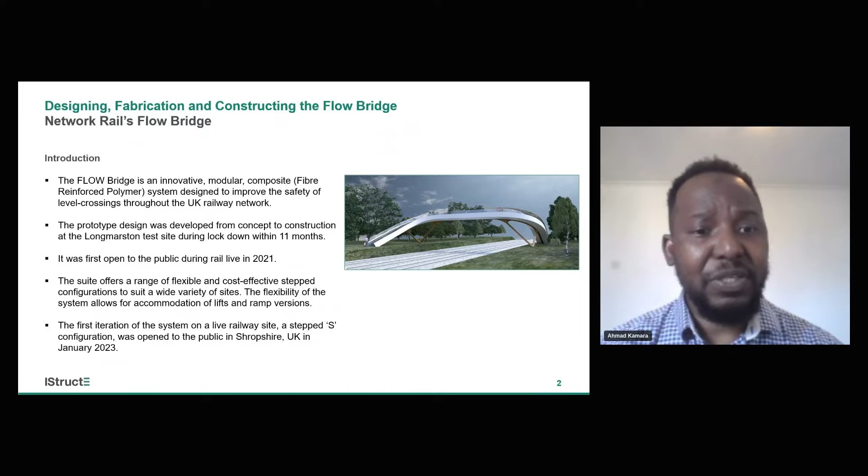The flow bridge is an innovative modular composite footbridge developed by Network Rail, and the initial purpose of it was to find a low-cost, effective solution for closing unsafe footpath level crossings. So to give a synopsis, it took us 11 months from developing the concept to fabricating it on the test site. The design was done during COVID as well, and it was first open to the public during Rail Live in 2021.

The design takes a different approach to modular by looking at various concepts and adaptability that could incorporate a stepped version, a lift version, and a ramp version. But for the purpose of this presentation, we'll stick with the prototype, which is the S-shaped version of the flow bridge.

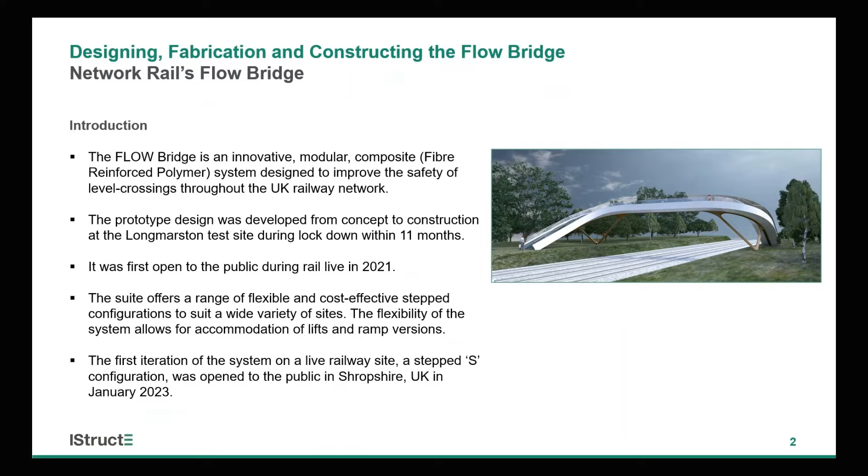Right from the start, the site selected for the footbridge was a non-station environment, which had a dangerous footpath that had been temporarily closed. So we wanted to use this as a test site to demonstrate what this can do.

The objective we had was to develop a low-cost, light-weight footbridge that was resilient, more durable, very easy to maintain, and easy to construct. We also wanted it to be an enabler to help us achieve Network Rail net zero targets, which is to have costs reduced by 30%, carbon reduced by 50%, and the concept developed from inception to entering service within a year.

As a result, some of the criteria for the design meant we had to limit the maximum weight of any modular unit to 2.5 tons to allow RRVs to install it over the railway. Finally, we wanted it to be something that looked good, so it would be accepted in local communities and by the planning authorities.

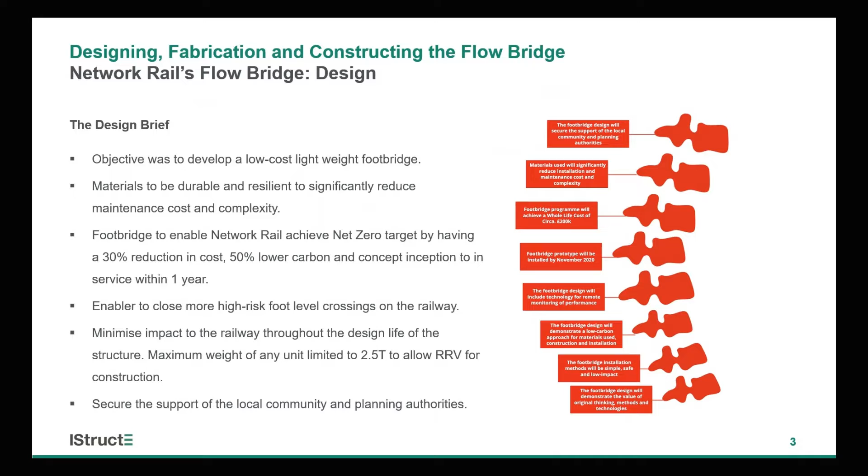The main challenge we had was right at the start of the project, COVID struck, so there was no way of meeting each other physically. We had to find new ways of working together.

Another challenge we had was with FRP design - there was no structural design code for FRP design. We had guidance documents, and at the time of the design, the main guidance document was the CIRIA C779, and we had Eurocomp and other design codes. So what we had to do is look at those with the existing guidance we got for steelwork design and Network Rail standards and other guidance documents to try and figure out how we can get this design done.

There was also lack of manufacturer's data, EPD data, which posed a lot of challenges. We also wanted this footbridge to be a game changer to showcase what's done in composite, rather than copying traditional steel design. We wanted to utilize the material for what it is, which has a high strength to weight ratio. So we thought the design ethos should follow that.

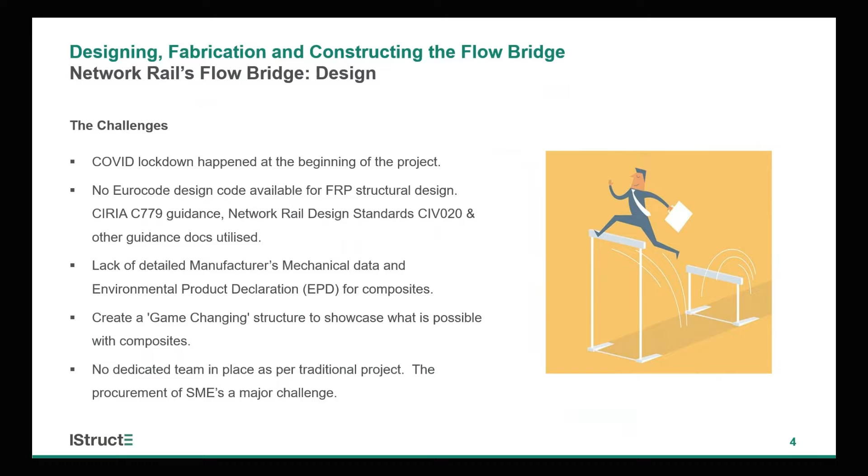So we had no dedicated team in place, so we had to build the team together. But the other challenge we had was securing funding. We managed to get funding from the R&D Research and Development Fund, which enabled us to do the design.

To do that, we wanted to innovate right from the start and do something different. Lessons learned from past projects showed that 60 to 80% of project costs occur during construction, and a lot of time the project cost exceeded the target cost, reducing stakeholders' confidence in our ability to develop projects on time and within budget.

So one of the things we did is Network Rail took on the design and construction lead by taking on these risks. Then by having the research and development funding, that simplified procurement a lot, which meant it allowed us to find the relevant small to medium-sized UK enterprises with the skills that we needed.

From the start, we had Network Rail in the middle, and then we had Knight Architects, who is a renowned architectural firm - we engaged them to help us with the architectural aspects. And then we got SuiGeneris, who do design for baffle tanks and boats.

So we got them on board to help us with the fabrication of the superstructure deck. And then we got Jacobs, a well-known engineering firm with a lot of expertise in FRP, to be the category 3 checkers.

Q-Railing provided the glazing system for the design. KS Composite actually make Formula One cars, but their knowledge in composite materials meant engaging them would be really useful, so they were involved in fabricating the spine, the pier legs, and the carbon Kevlar hinges.

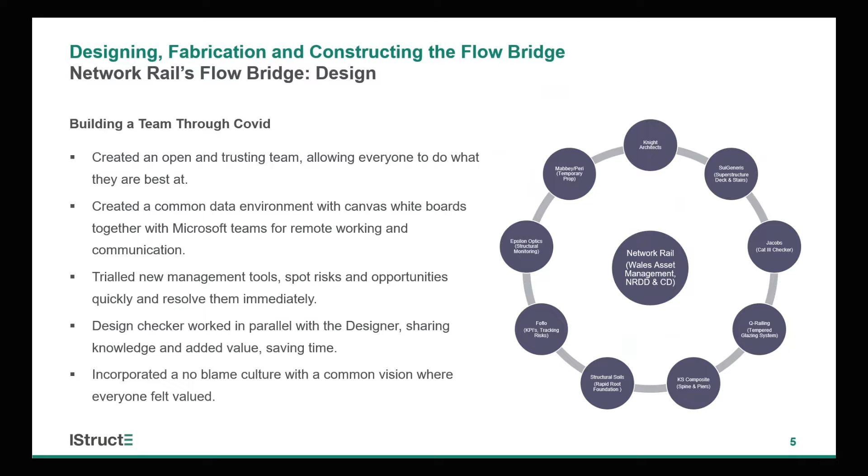We also adopted a no-blame culture. Everyone had a common vision to make sure we deliver the goals and everyone's valued. When we encountered a problem, we just came together and resolved it to find a solution.

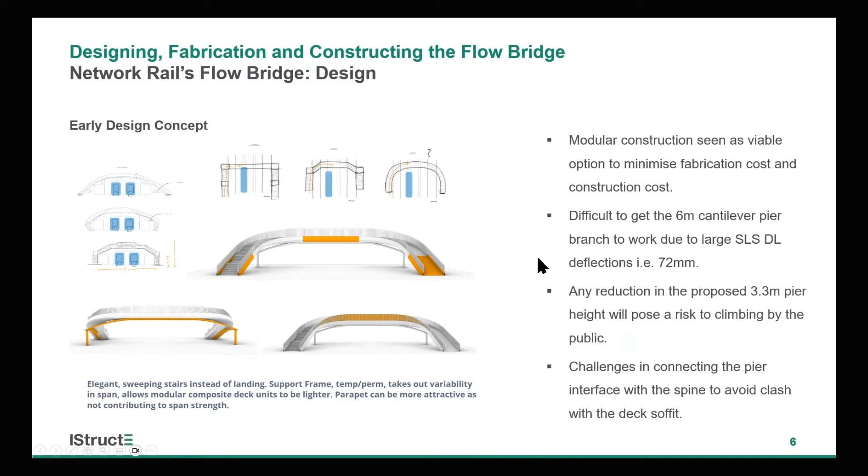That same effect was reversed on the bottom stairs. One advantage of this form of construction is that a normal footbridge of this size would have 6 footprints for the foundation, but we minimized that to just 4 footprints. So that was one saving.

The second thing we looked at was the deck itself. We wanted the spine to provide temporary support for the bridge as well as permanent support. So to minimize the amount of temporary works, we had a gravity clamp system for the deck, where the deck would close and lock over the spine, and then the deck slab locks it in place, effectively making the structure composite. I'll talk about that in the next slide.

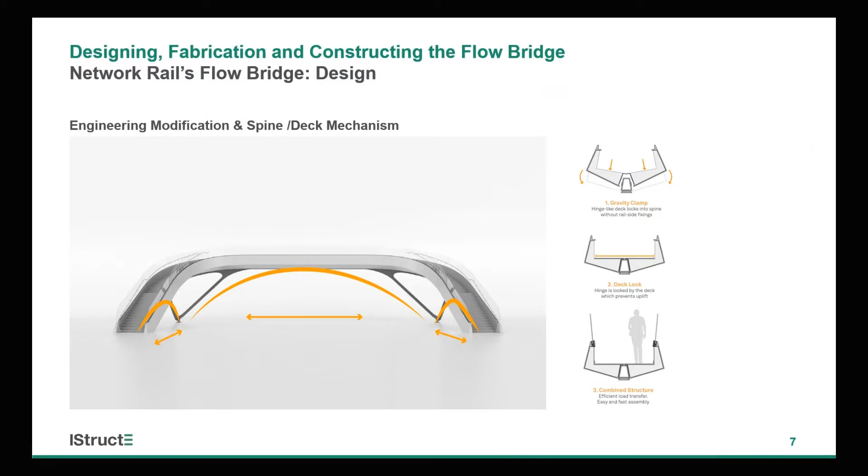So this diagram illustrates how the bridge itself works - the philosophy. We have the yellow bit being the spine itself with the deck over, and we have a carbon Kevlar hinge that runs along that side, which allows the deck to open and close. I'll talk about that in a later slide.

Everything in this unit was fabricated, so nothing was pultruded - it was all made by specific design. The deck acts in tension, and then we have the unit basically coming down, locked in position. With the FRP angles attached to the side of the deck unit, the deck unit is then bolted in position.

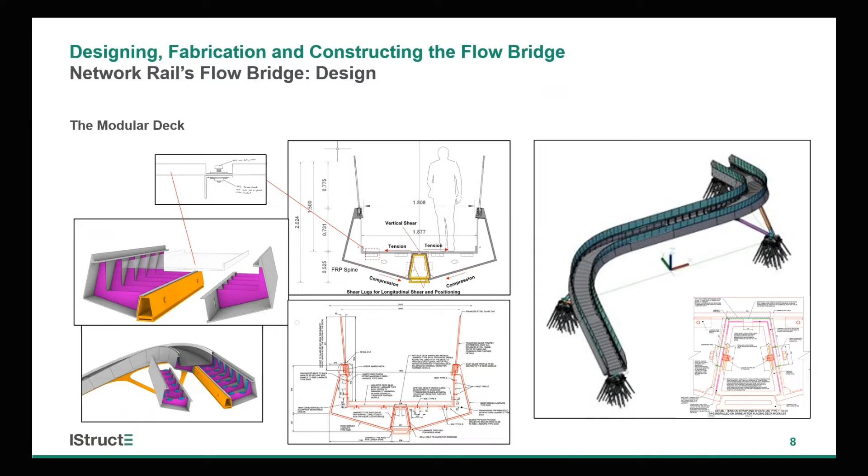The spine is designed to support the weight of the modules during construction and act compositely once everything's put in place.

It was designed to be adhesively bonded as well as bolted, and both designs had to satisfy the design code. For the site-based connections, we utilized bolts, but with a debonding layer - the adhesive in between acted like a gap filler to allow loads to be transferred while keeping the unit nice and tight together when bolted.

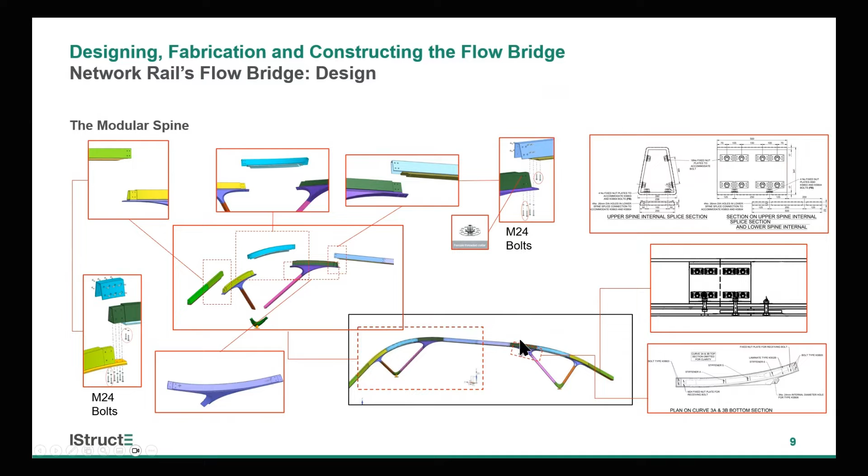We utilized a 3D parametric model for the structure, created by Knight Architects. That created a virtual environment to enable us to test any concept in the design and validate it. Because we were working remotely, it was useful to check and identify any clashes or problems early before being on site.

For the temporary props, they were tested and designed within this environment and then applied on site, and that worked well. A lot of the fabrication and design drawings were produced from this model because it had every single element, which made things seamless in terms of utilizing and detailing.

For the spine legs and the pier legs, we produced some of the drawings and some were produced by KS Composite.

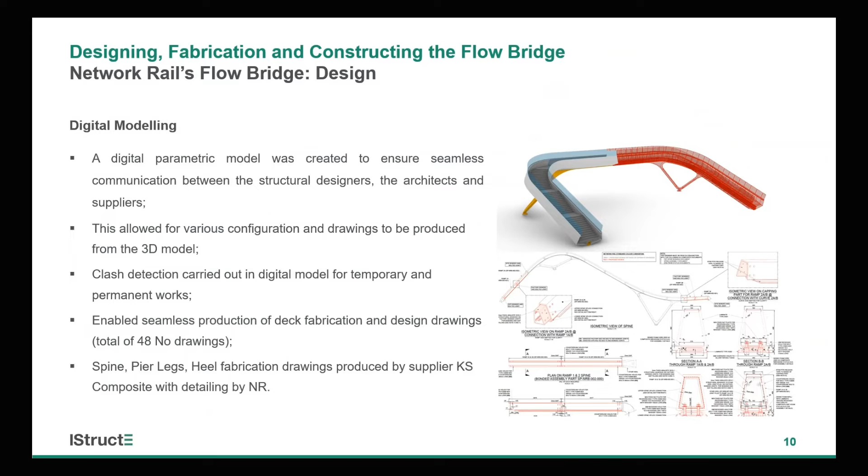The philosophy of this design was to enable the spine to act as a temporary structure to facilitate the construction works, and then in a permanent condition, work compositely together with the deck afterwards.

The spine also enables us to correctly align the bridge in position as we go along, and it enabled the bridge to be stable at all stages of construction - meaning if we're running out of possession, we can secure the site and leave it over the railway safely. That was a big game changer because a lot of the issues we normally have is disruption to services, so we wanted to minimize that.

For the design itself, because it was a new material, we had to limit the strain of the material to 1%. And because the material was not validated by testing but we were using manufacturer's literature, we had to use higher material partial factors of safety as per the requirement of the CIRIA guide.

The hope at the time of design was that by carrying out testing afterwards, when we do the second version of the bridge or a standard version - which is currently being done now - we can reduce these factors of safety to make it even more efficient.

For the bridge design itself, when the units come in, we took into account the safety of workers. We had the unit installed with the side parapet and edge protection, and we also had brace points for people working in it, so they could click on their harnesses at those locations while walking in there safely.

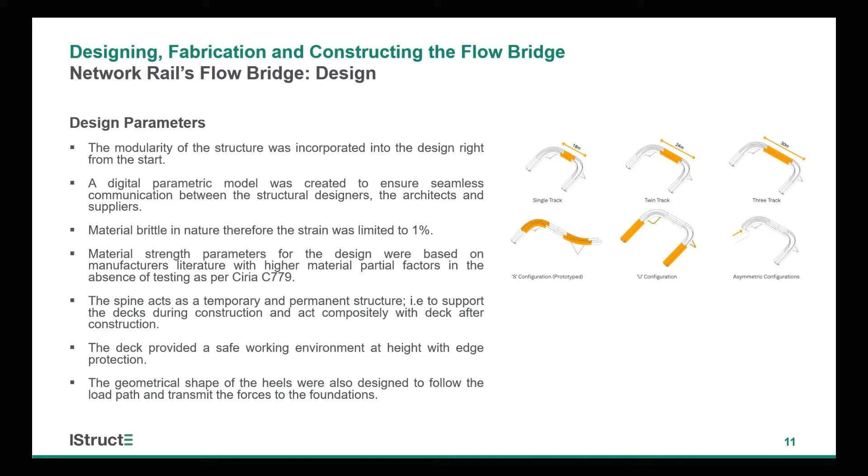Other design considerations we looked at when designing the bridge was to ensure that during the temporary condition in the factory, lifting conditions and storage in the cradles were already being sorted out.

We also wanted to make sure that when lifting the bridge during construction and the stage construction by RRV, we had to look at that temporary condition and also maintain stability of the bridge when it's put in over the spine, and also for the permanent condition when it's acting compositely with the design loads.

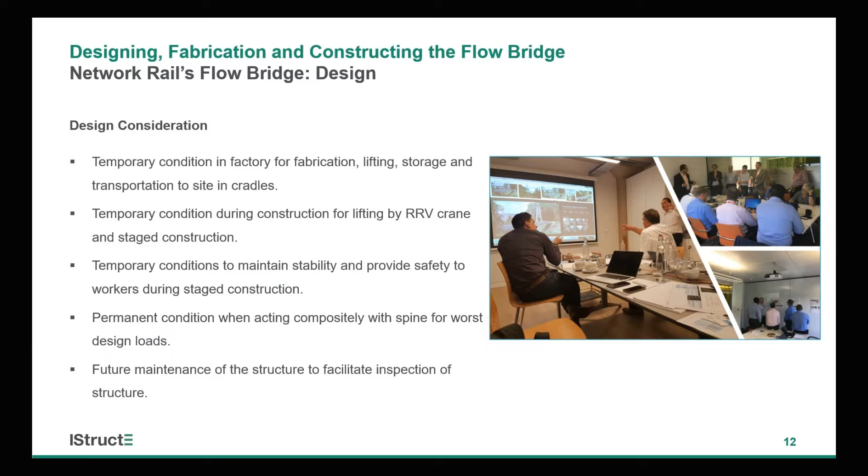On top of that, we also wanted to ensure that when the bridge is inspected in the future and maintained, if certain aspects of the deck elements need to be removed, they can be removed safely without compromising the safety of the bridge itself.

Just going into composite itself, one thing to clarify is this is not like steel or concrete, so every single material on that bridge had to be designed. The way composite works is you have a fiber and then a resin, and you combine the two together, and that gives you a composite.

Depending on the plies you have for that composite stack, you can lay the stack on top of each other with different angles, different orientations of the fibers, and depending on how you do that, it gives you different mechanical properties. The fibers provide most of the strength.

The resin or binder allows for load transfer to the fibers, and depending on its properties, it can provide environmental properties such as temperature resistance, chemical resistance, and sometimes fire resistance depending on what you put on it. The advantage of this material is it has a very high strength to weight ratio, so we wanted to capitalize on the material properties for the design.

If you just use the laminate on its own as a monolithic laminate, it's strong, but to gain more efficiencies and reduce costs, what we do is have a sandwich approach where you have different skins of composite with a sandwich core in the middle, which is very lightweight, and that enables you to have thicker sections, which give you better engineering properties, but at a fraction of the cost.

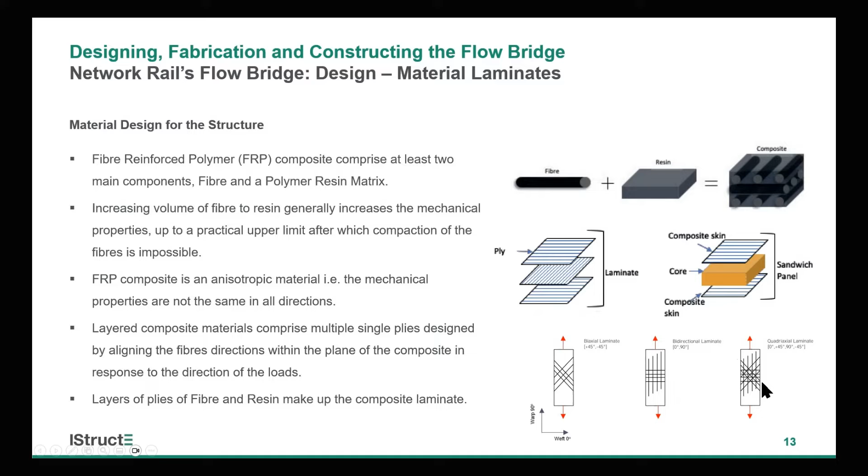For the design itself, we utilize biaxial laminates, so the laminates could be at plus or minus 45 degrees, or it could be 0 degrees and 90 degrees. We also utilize quadraxial laminates, which is 0 degrees, plus or minus 45, and so on.

For the bridge itself, to put things in context, for the spine design we actually had 16 different types of laminate. Some of these laminates had foam cores in them, some didn't. For the deck itself, we had 15 different laminates. This diagram shows an example of typical laminates we utilized for the bridge design and their thicknesses.

One of the things we did was, where the deck was being made, we had a layer of gel coat on the outside, and that gel coat is what actually provides the waterproofing to the laminate, and it protects against breakdown of the fibers and UV degradation, and it can also incorporate the color of the structure that you want. Followed by that, we had layers of chopped strand mat, which allows a smooth surface for the gel coat to bond to.

Then you have your fibers themselves. So you can see the gel coat, chopped strand mat, and then your main structural fibers coming in with the core in the middle, and the same happens the other way. For this approach, we had a balanced laminate where we had equal laminates on each side, and in some areas we didn't have that.

For the spine gusset pier legs, they were made with biaxial glass, and the orientation of the fibers was designed depending on where it's required. For the heel, for example, we had carbon Kevlar at 0, 90, plus or minus 45, depending on where it's needed. All the joints with bolted connections had no core in there because we wanted it to be solid, and we didn't want issues with cracking along those locations.

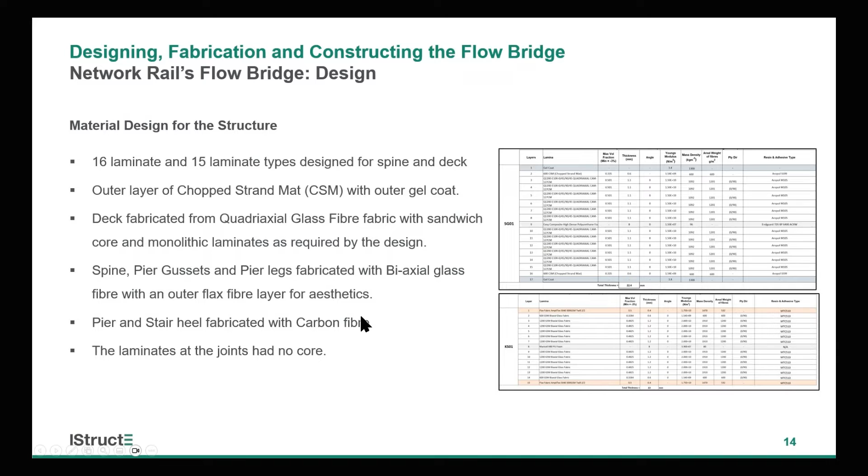From the analysis point of view, we utilized Lusas software for the main structural analysis, and we utilized Robot software, which I'll talk about later. The glazing self-weight was added onto the model by putting the self-weight onto dummy members which were beams on top of the parapet along that length, and the associated vertical and horizontal loads and moments were then applied on those elements. We use shell elements for the deck itself in the global model, and beam elements for the spine, pier legs, and supports.

We then created a separate FE model for the pier heel and the stair heel, because we wanted to understand the effects of them locally. We then utilized the boundary conditions that we had from these, calibrated it, and analyzed these separately so that they could be designed and checked.

We did hand calculations to validate what we've done to make sure everything's fine, and the analysis included static, dynamic, nonlinear analysis to check for buckling, the construction sequence, and other analysis as well.

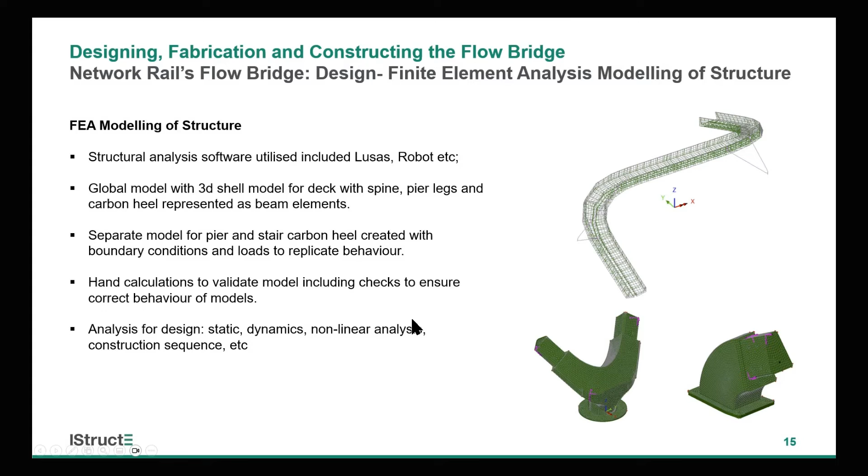For the pier heel, we initially wanted to have steel plates with steel stiffeners, with a steel tube at the bottom, then wrap it with some form of foam, and maybe glass fibers with exterior protection. That was the initial design philosophy we looked at.

When we analyzed that, we soon found out the stresses were exceeding the stress for the steel plates we had. So we did an independent check using Robot and Lusas, and got the same result. Then we checked that with the checkers at Jacobs, and they confirmed the same thing as well.

There are a lot of solutions that were developed, some we never come across before. On the bottom bit, the solution was to have the top bit with a foam core interior, CNC'd to get that shape, and then you can drip the carbon over it and the Kevlar. The green bit is a steel insert machined with a threaded piece in there, and everything is molded and wrapped around that.

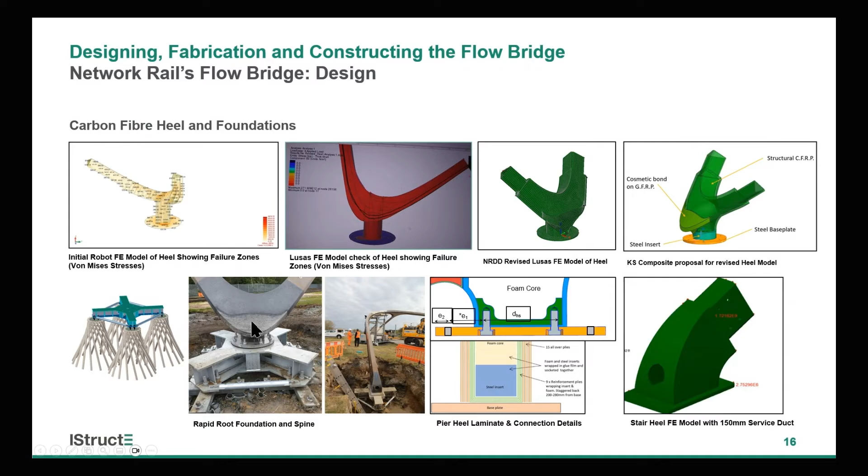Dynamics was a really important thing for the design because of its lightweight nature, and was one of the critical load cases. We wanted to make sure the vertical frequencies exceed 5 hertz and the lateral frequency exceed that too.

When we did the analysis, we checked all the different modes, and these were the ones that were propping up. We found mode 1 was critical because it was a vertical frequency less than 5 hertz. To understand that, we had to look at the modal displacements as well, so we plotted that for all the modes. You can see on mode 4 that you get both vertical and lateral movement.

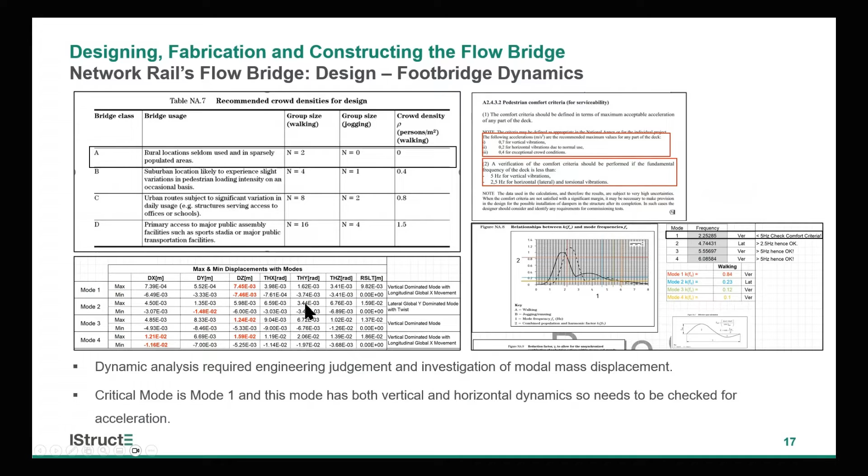We had to check the acceleration limits for the comfort criteria in accordance with the code. We did those checks and found it was okay for bridge class A in dynamics.

This is just some videos to show what was picked up from the dynamic analysis and how the bridge behaved, shown here in plan. For us to do that, we had to have an overall view of all these bits put together to see how the bridge behaves.

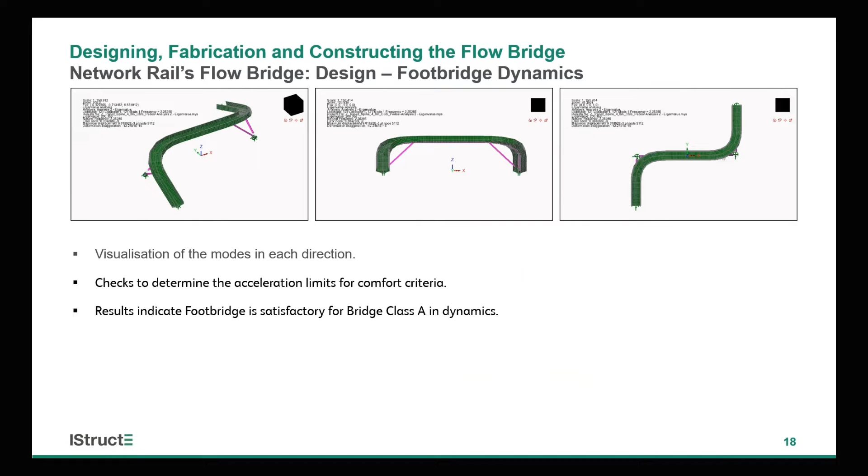Another area of the bridge design was wind loading and aerodynamics. Because of the complex shape of the bridge, it's really difficult to understand how you're going to apply the wind loads on the bridge. So we wanted to minimize the number of load cases we had for wind and aerodynamic load.

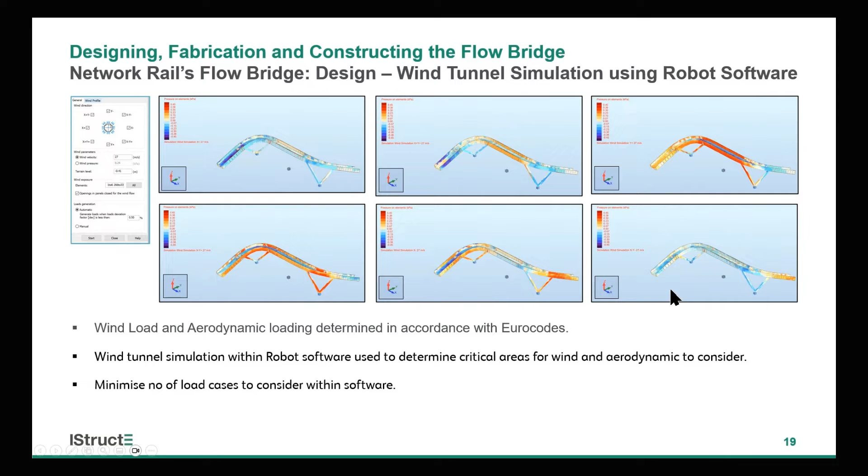We put a 3D model of the bridge within Robot software, which has a wind tunnel simulation module, and carried out the analysis on that. This shows some shots of the critical areas identified, which helped us minimize the load cases needed for the analysis, since we could apply those loads directly in our load combinations to simplify things.

In the design stage, we look at the initial design. We wanted our foundations to be on a fixed base, but when we looked at that, the moment meant we needed a much larger cruciform base. So we would require 2.5 meter cruciforms, which increased the footprint of the railway. Part of our design was to minimize that impact, so we had to look at ways of reducing that.

We carried out sensitivity analysis on the fixity of the foundation, as well as the lateral spring stiffness, based on the stiffness of the pile group, working with the pile designers to determine the most efficient way of reducing that. We found that by having a pin support, we can reduce it from 2.5 to 1.5, which seemed reasonable.

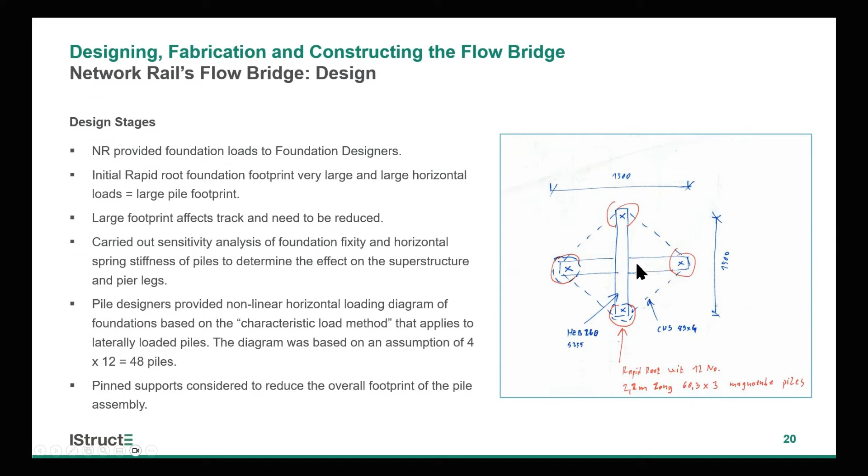We achieved the pin effect by putting a C40 grade neoprene under the base plate of the foundation, which sits around that location, and then bolting it on. The deflection of that, similar to how an elastomeric bearing works, enabled us to get the right rotation for the design, and we were okay with that.

This shows the idealized construction sequence we had when we did the design. We had Mabey props in there - note the size of the Mabey prop. They posed a lot of challenges for us during construction because of their bulky nature. It was difficult maneuvering that V-leg over that, and we had 2 locations for it to rest on. That prop actually helps us align the position of the bridge as well, so if you get it wrong, you wouldn't get both sides aligned.

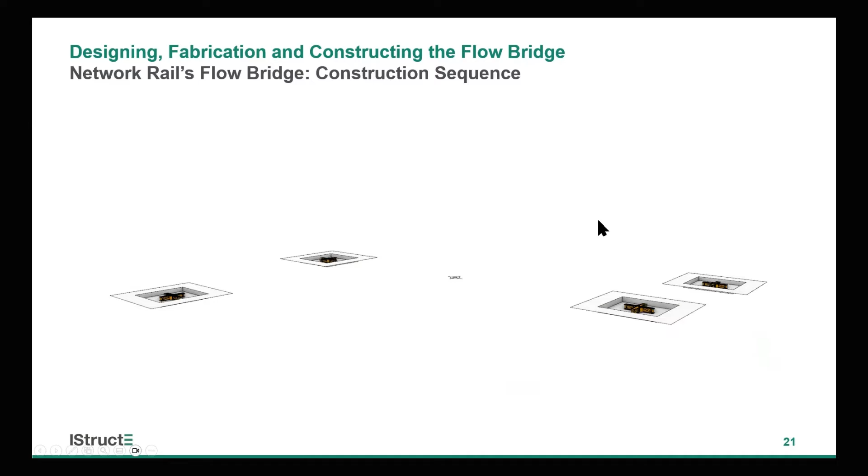We had to utilize a balanced construction method to minimize the deflections. So if you do one ramp on the left side, you do the other on the right side, and the deflections cancel out.

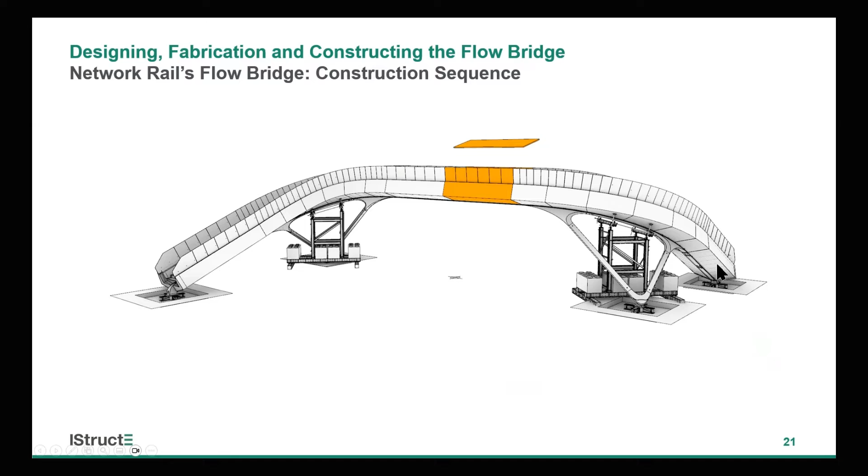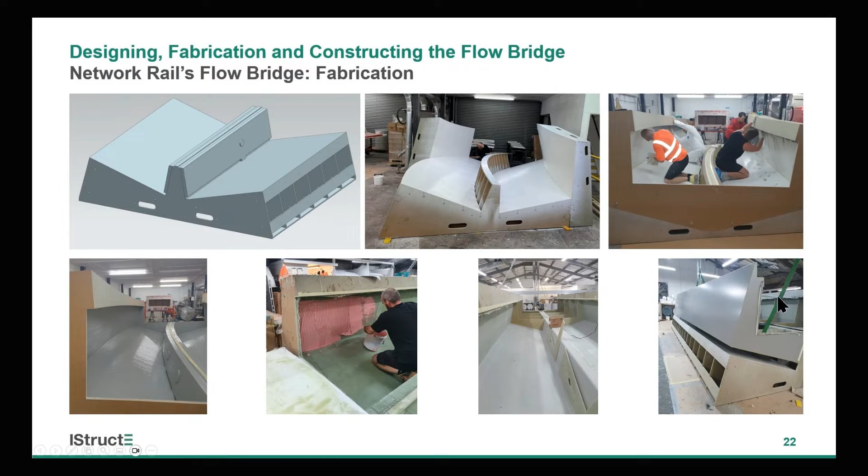Once the bonding paste is done, the laminate laps are then put in, which you see on the following slide. In this image, you can see the unit being released off the mold and lifted initially just to test the lifting straps as it's being done.

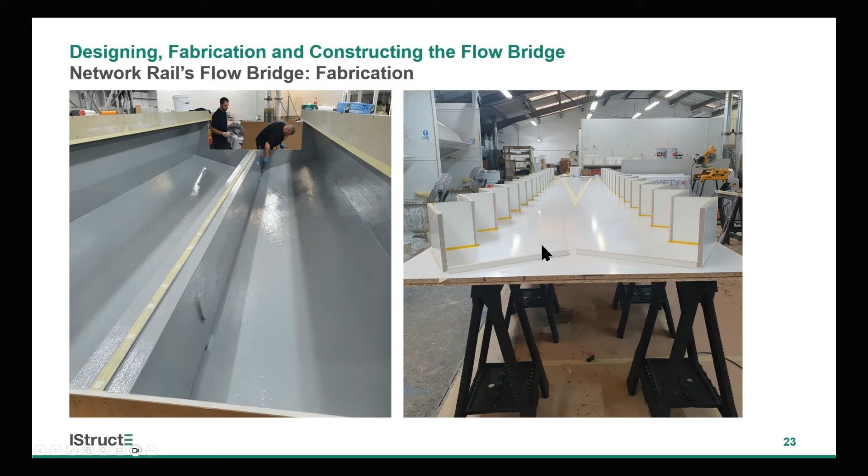On the image on the left, you see a ramp module with the gel coat being applied on it. On the right side here is a mold for the side fascia panel, as well as the supporting bit for the step unit for the ramp.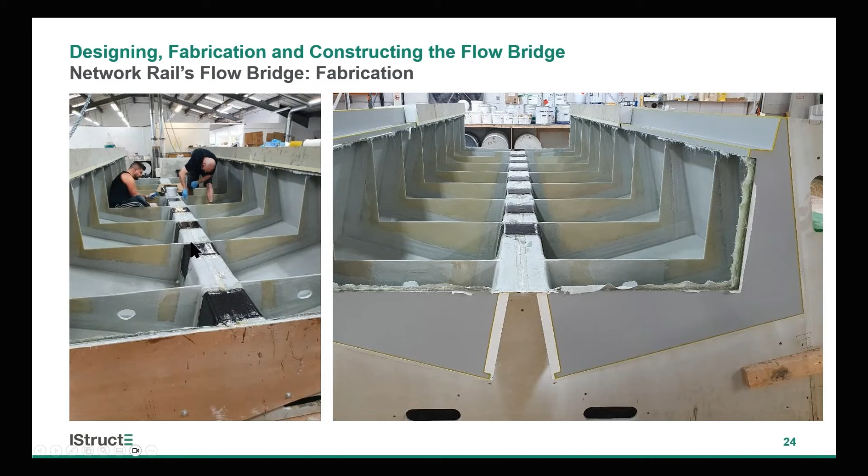As mentioned before, here you can see the carbon Kevlar unit hinge being applied - it's added in afterwards. You can also see the additional laminate layer added either side of that, of course, to bond it securely to the deck unit.

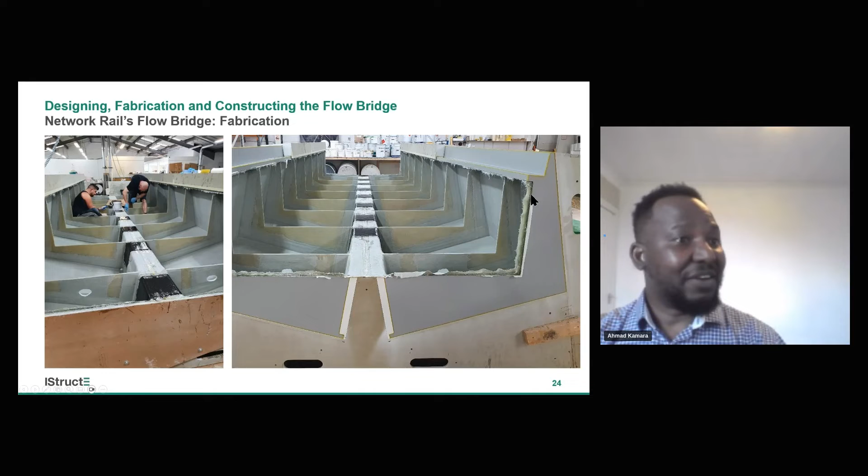Where you've got these holes are the special lifting eye locations for lifting the bridge, so we've got additional laminates put in there to secure it as well, which I'll show on the next slide. On this slide, you can see the elements, but the edges are rough, so they need to be trimmed off and ground down, and then it'll be ready to go on site.

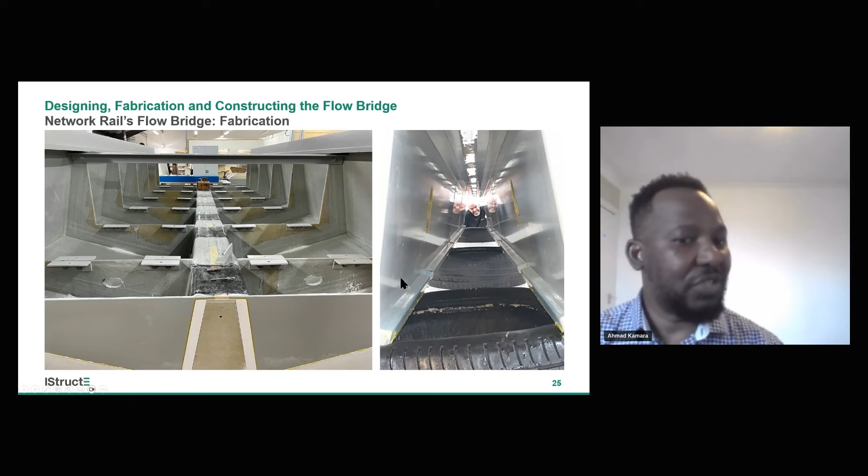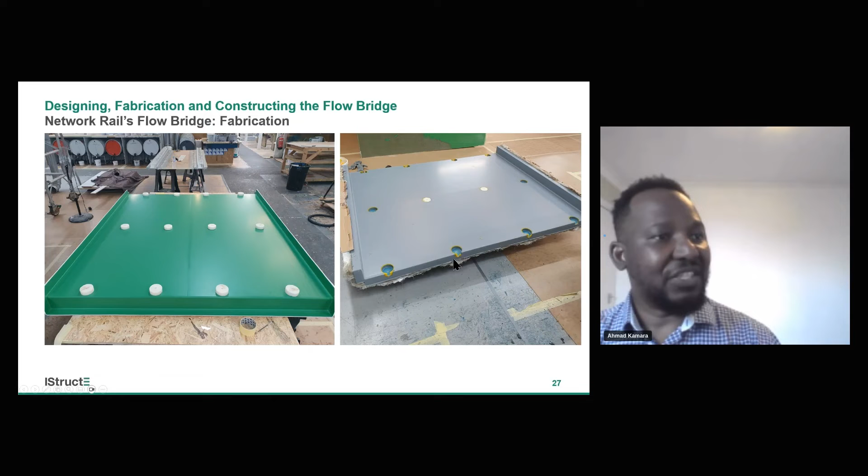And this has got a sandwich core, or where you've got the connections and everything, it's a solid core with no foam in it. That's just showing you the deck slab units being put in position with the holes in place.

One of the lessons learned in the factory was when this was done in the factory, it was done on a flat surface, so there's no deflection. But when you go on site and it's on the spine, you're going to get deflection. So to allow for that, we had a slotted hole put in that position there.

But once that was done on site, that hole was then filled with liquid metal filler or liquid putty to seal all those holes, to make sure you've got the right edge distance and bearing for those bolts at those locations.

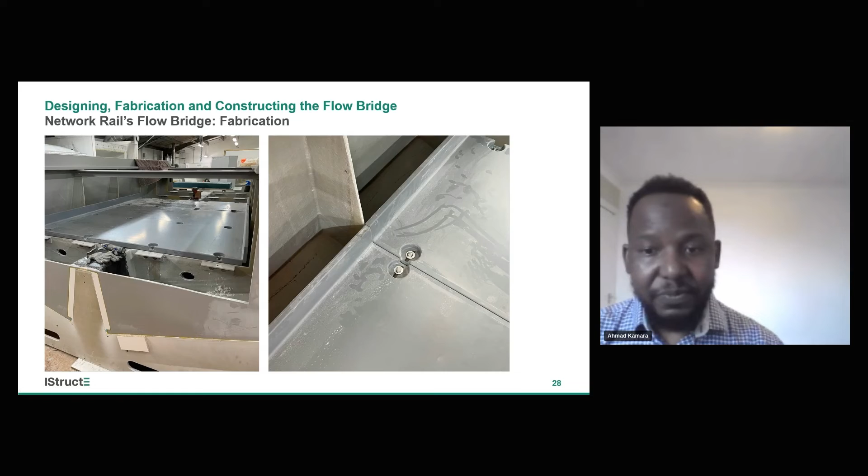We provided additional holes in some of the units. That's areas for where people walking on the bridge can clip on their harness and support themselves there, so when they're walking towards the edge, they're protected against falls.

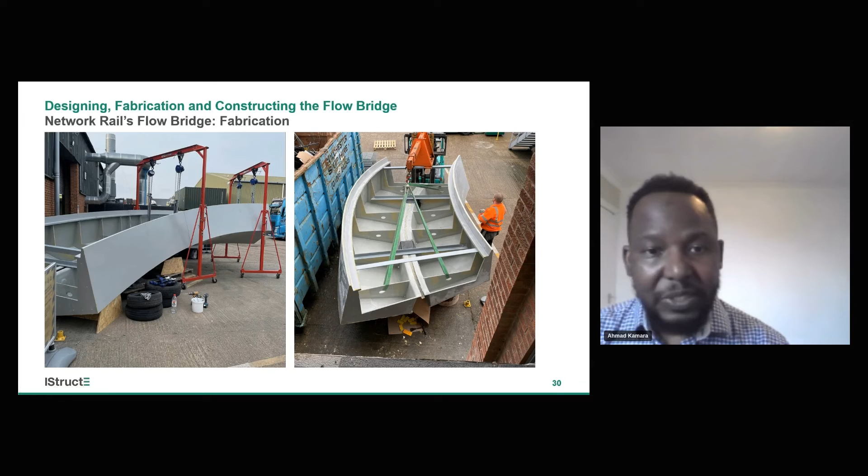Next slide showed in the factory, we had a ramp unit put together, and then the stair modules and side fascia panel were tested in the factory to make sure everything fits perfectly, with the holes being drilled before it was taken on site.

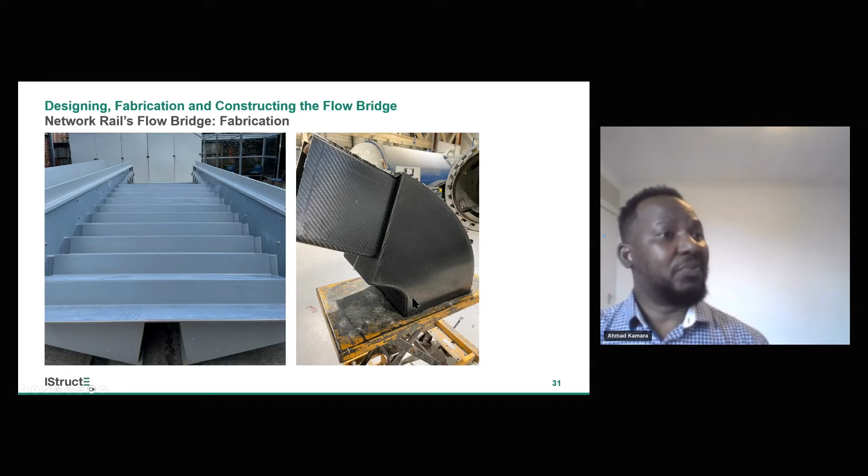And on the right is showing the stair heel being put in position, basically, and locked in position before other bits of work are put into enhancing it.

This bit is looking at the fabrication of the pier hinge. On the image on the left, we utilize carbon fiber and Kevlar in between for constructing this hinge. We had CNC foam that was CNC'd for the shape, and we utilize a pre-preg laminate.

So pre-preg carbon and Kevlar were laid over each one of these, and then put in the vacuum bag to remove the air bubbles and get them to stick together. Once that's done, they were transferred to a high temperature chamber and cured.

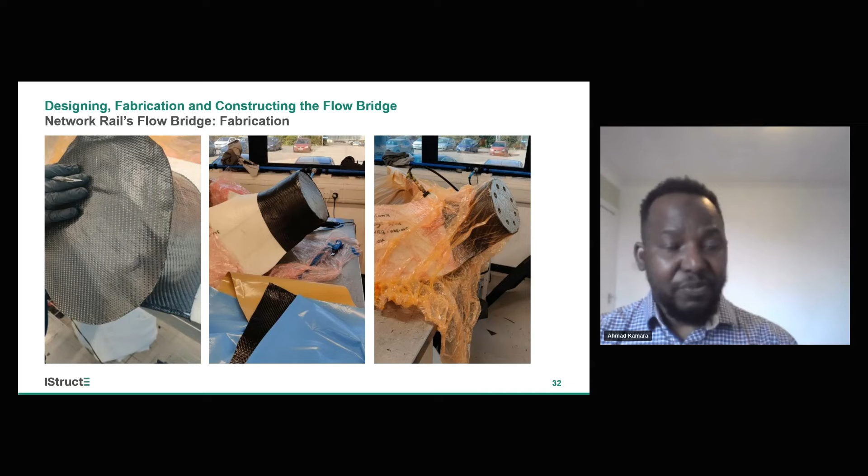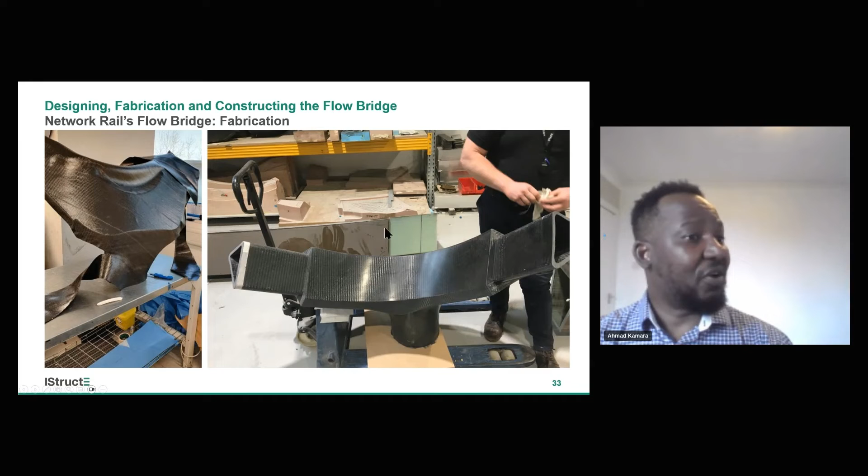In that chamber, the temperature is raised to 130 degrees. Once the tooling hit that temperature, they were cured for up to 3 hours, and then it was taken off that unit. The image on the left shows the draping of carbon along that pier heel, and the right shows a cured unit that's come out of the mold ready for the works.

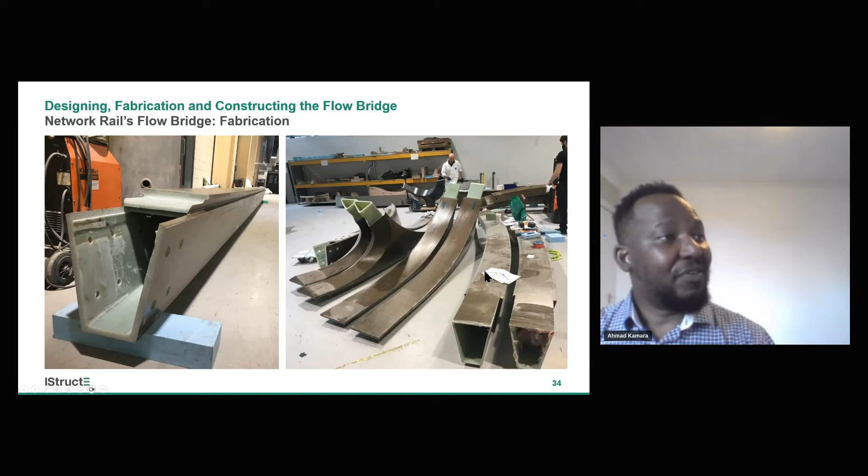On the left is a typical fabricated spine. You can see it's got a glass fiber interior, and we utilize flax fiber for the exterior. Flax wanted to provide a level of aesthetics on the bridge as well as protecting it. You can see the gussets there on the curved spine and the top bit of the curved spine, waiting to go to the next stage where they're going to be bonded and bolted together, and that will form part of the curved unit for the deck.

On this slide, you're seeing the rapid root steel cruciform being fabricated. You can see this is missing the top plate.

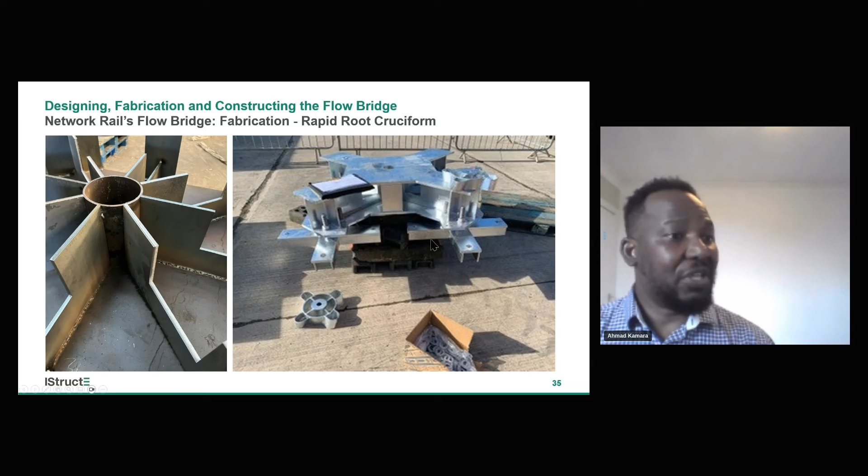And here is basically the trial installation of the bridge itself in Longmarston. After 9-10 months, from concept to fabrication and check-in, we had this built on that site. This was done during COVID, and in that image we put in the curved spine.

The legs, the heel, the base plate, as well as those bits were assembled on site, then lifted up by an RRV and dropped in position. You can see they were propped there, so it's quite bulky, making it quite a challenge putting that around.

That meant it was one of the items on the to-do list, to see what we can do to make that better next time round. That shows everything being put together, then the deck units being installed without the glazing at this stage, with the glazing done afterwards. It took us 3 weeks in total for constructing the whole bridge.

This site was a test site, not a live railway site, which enabled us to simulate what it would be like building the bridge on a live railway site. We had 2 to 3 days delay due to weather, which prevented works being done, but even with that, it was really good.

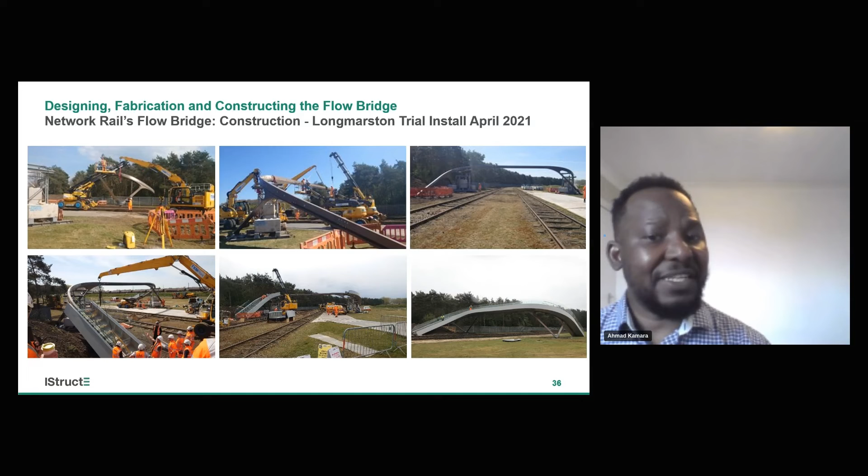When the bridge was constructed, before the deck was put in, all the structural health monitoring was installed, calibrated, and tested. This shows the Longmarston test site with the units being installed and testing the glazing on.

One thing to note is we had very cheap saddles supporting the bridge - 2 or 3 discrete saddles made of OSB board. The disadvantage is when the ground is uneven, you can see in that image it causes the carbon Kevlar to twist, and in some cases it started causing delamination.

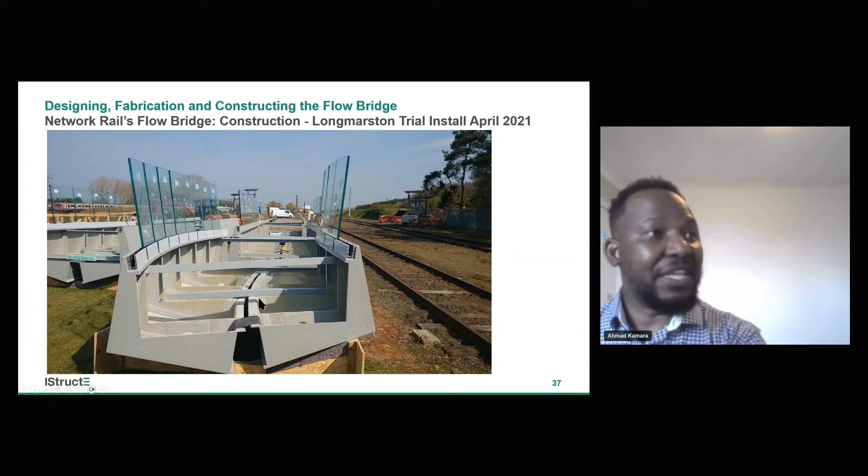That caused us to review the design ethos we had before and make sure we could correct those issues before we came back to site.

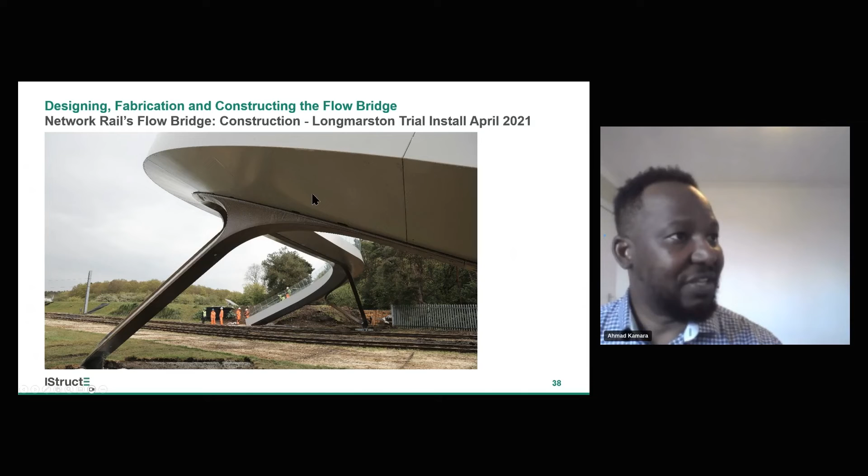This is the finished product. As you can see, the deck was done by a different manufacturer than the spine. We never met, but because we did it in the 3D virtual environment using the drawings - the BIM drawing, everything - it fit perfectly when we got on site.

We then dismantled the structure from Longmarston and took it to a shed in Melton Mowbray, where we installed the bridge to carry on modification works and improve what we did.

One of the first things you can notice is we changed the prop - a much smaller prop system, a Peri prop system with a triangular base. At the top, we designed a carbon Kevlar and glass fiber saddle that follows the contour of the spine, with steel base plates and tapered plates following the alignment on each side. That enabled us to get the spine orientation right.

The stools for the support in the bridge had to be designed such that the deflection at the level of the base plate would be no more than 2 millimeters. Otherwise it would affect the entire design we'd done, and we didn't want to do that. So we then had to look at what we could do.

We then installed the units with the glazing on each module, leaving the end modules out to save time on constructing - we wanted to see how that was possible. The lifting points were designed to take the entire load anyway, so that helped us.

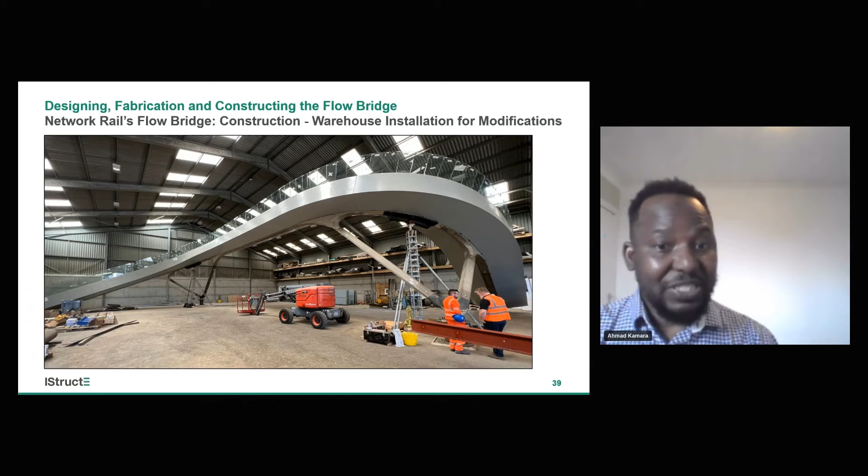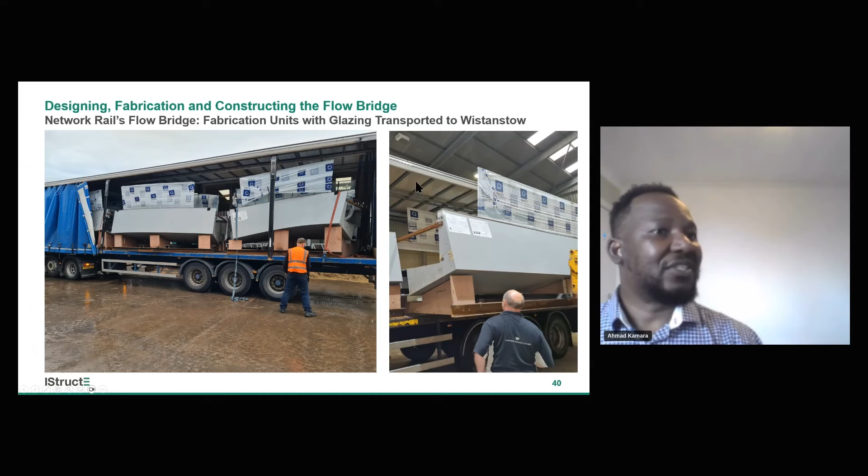We also had temporary bracing at the end of the units to secure them in place, and additional bracings within the unit itself, which I'll talk about later. The end units were removed to prevent damage during transportation - when lifting, we didn't want it to clash with the other units, so we removed them, and these were done on site to minimize the amount of construction work to be done on site.

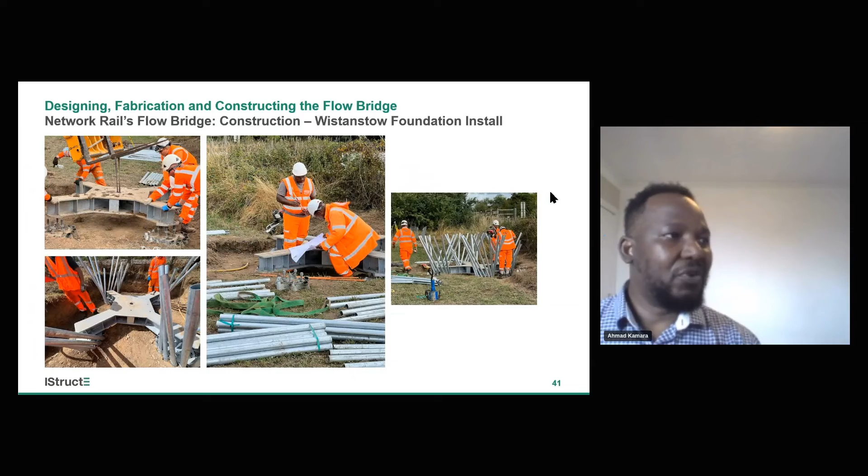But now on site, while that was going on, the site work started with Rapid Root, where we had piles driven through, and then the cruciform head dropped in, lowered, and bolted in. The vertical adjustment for the levels is accommodated by these bolts, so you can lift the cruciform up and down. But for the lateral adjustment for setting out, we accommodated that within the pier stools, which I'll talk about in the next couple of slides.

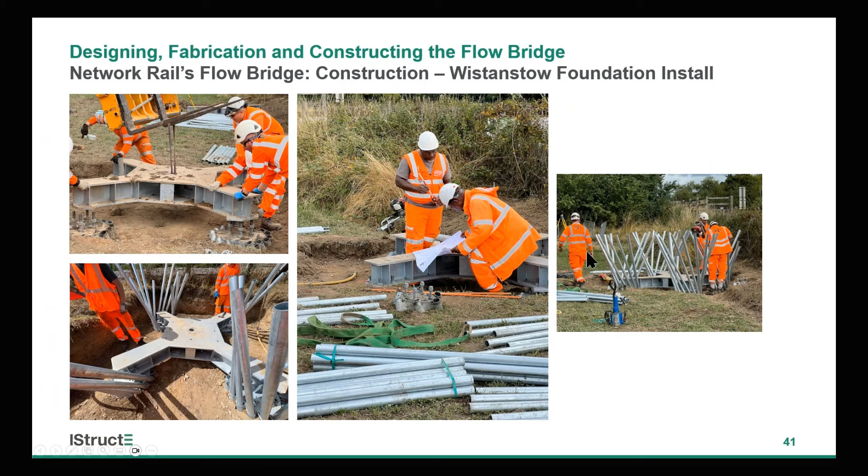The advantage with this is it can be driven by a 20 to 30 kilogram self-powered driving hammer, and it drives these tubes down to depths of approximately 1.8 to 2 meters below ground. It's got very little impact on the railway itself, so the whole works was carried out while the trains were traveling.

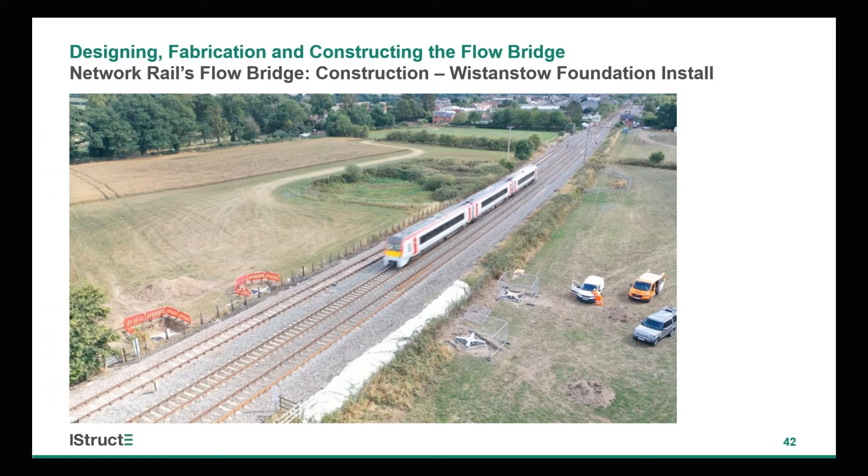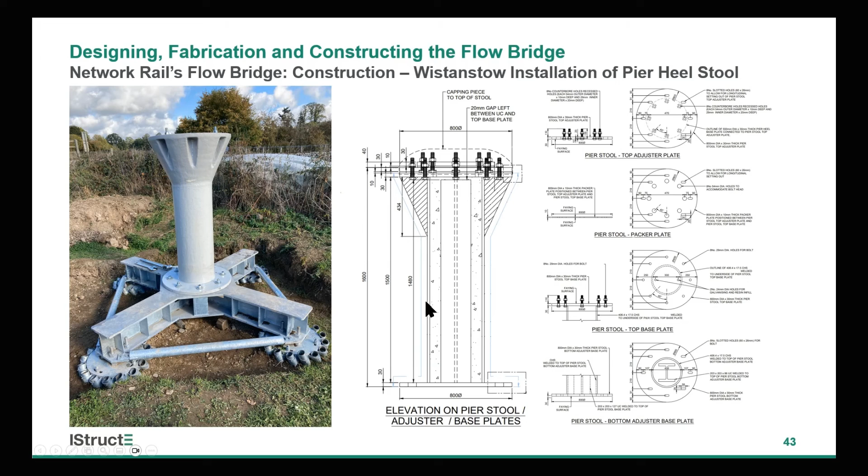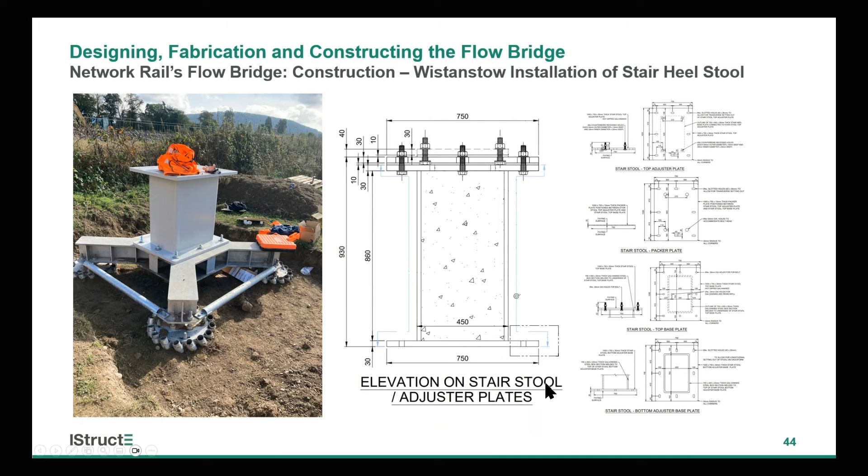The same principle applies for the stair, but because it was a rectangular arrangement it was stiff enough, so we didn't need anything inside — we just had to infill it with resin to get the mass we wanted, and the design follows the same principle.

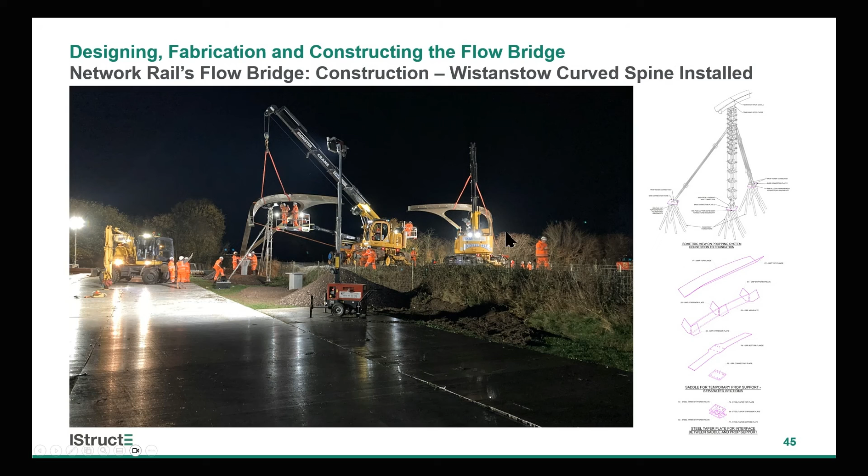So now, at Wistanstow, after that was done, we had a couple of possessions. The temporary prop was then installed, because the foundations were installed for those alongside the cruciform foundation. So on the first possession, we installed the props, and then the spines were lifted — the curved bits were lifted into position and dropped in position on either side by two separate teams.

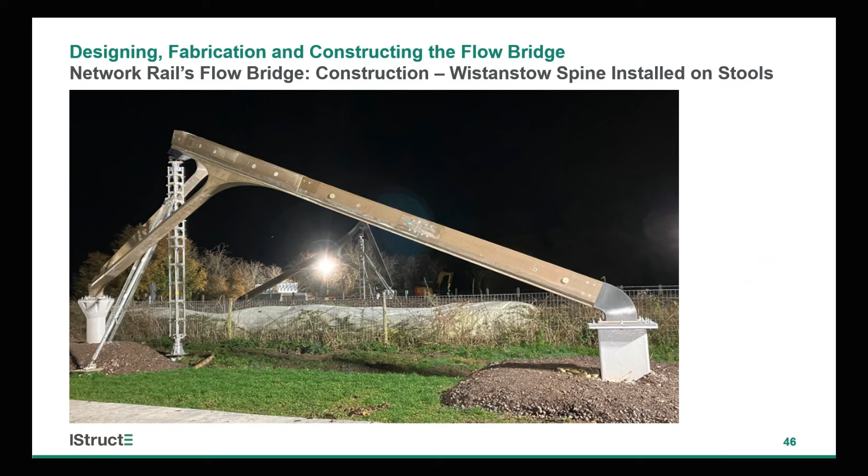In this slide, I just wanted to go through the temporary works on the bridge itself. At the end bit there, you've got end braces, which you can see — they're there to secure the units during transportation and storage on site, and they were removed before we lifted the unit. We had steel mechanical hinges there — one there and one there, so on the plan it's one there, one there.

And then we had these shackles on either side with a chain and a ratchet strap in the middle. The ratchet basically works by closing and opening. It allows the deck to open and close, giving us proper control of how we open the deck when it goes over the spine.

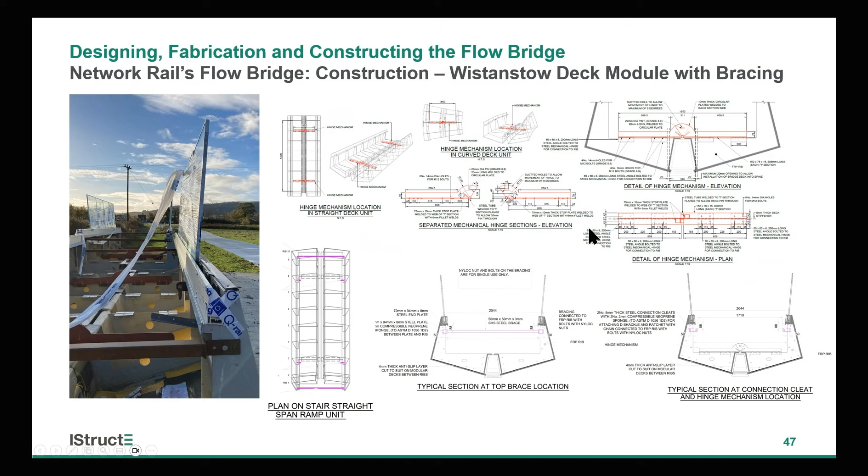So before lifting, the deck was open, lifted up a little bit and opened, and then it was in lifting position. Once it's over the spine, the ratchet was closed and clamped over the spine. Then end bracing was put in at the edge for edge protection, and the shear lugs and other necessary bracings were installed. So that just shows you how the deck opens and closes.

It was limited to 6.7 degrees. The mechanical hinge had limitations on it, so it only allowed you to open it up to that amount of rotation. Any more than that, there's a locking mechanism that stops it from going further. The lifting areas were strengthened with additional laminate—you can see laminate on either side lapped across there to reinforce that area.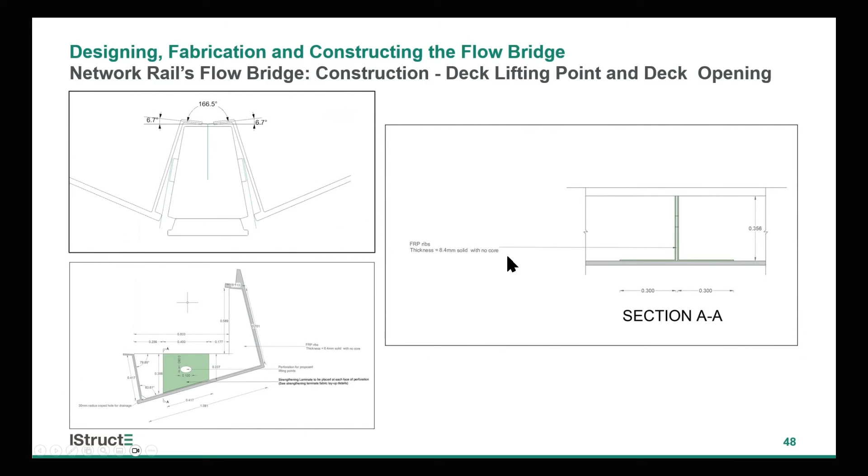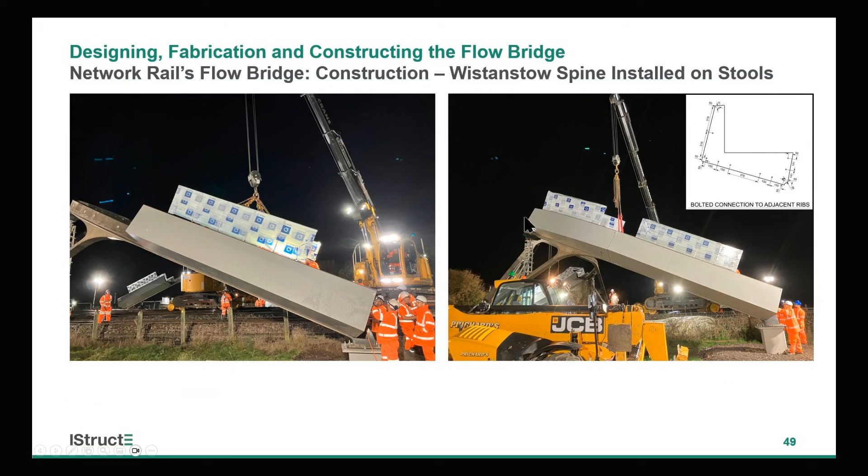At the interface of that curved unit with the ramp unit, the end rib has holes alongside the ribs. We had a bolted connection connecting those two together, providing longitudinal connectivity. Then the shear lugs were installed on the inside of the unit to secure it, and any permanent bracing was put in within the deck unit to secure them at the right locations.

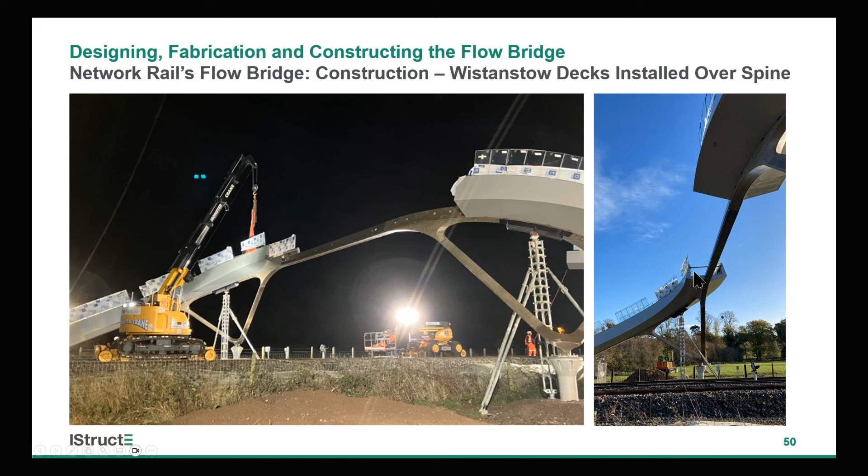At this location, you can see the units being installed, and the end brace there, which provides edge protection. You can see a bit of harness and rope, which the people working attach themselves to, secured on the deck. And that shows the whole unit being done.

We would have finished it in the second possession, but gypsies actually stole all our bolts for connecting that third unit in place. So when we went to look for them, we couldn't find any because they'd been stolen on site. I think someone left them outside. So we had to postpone it and come back for the third possession to put that in.

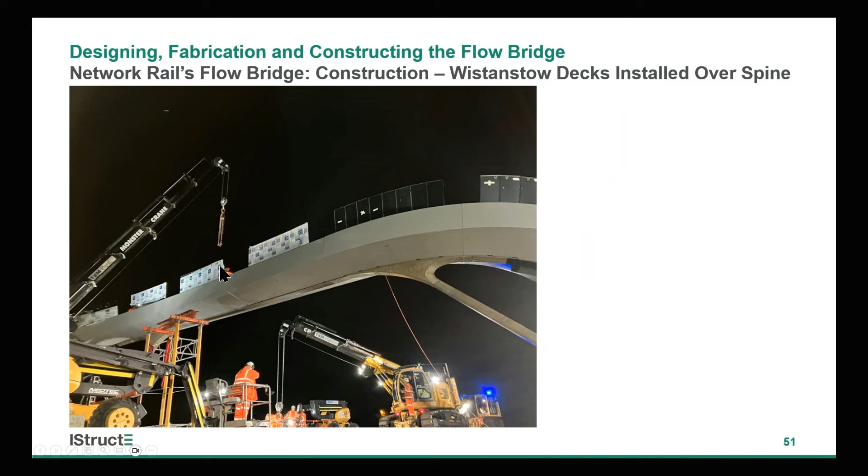After that, the rest of the glazing units were put in between these units with a cherry picker, and you can see it all being finished there with the site being handed over. Before handing over the site, the deck slabs were put in with the side fascia from the center of the deck, walking outwards.

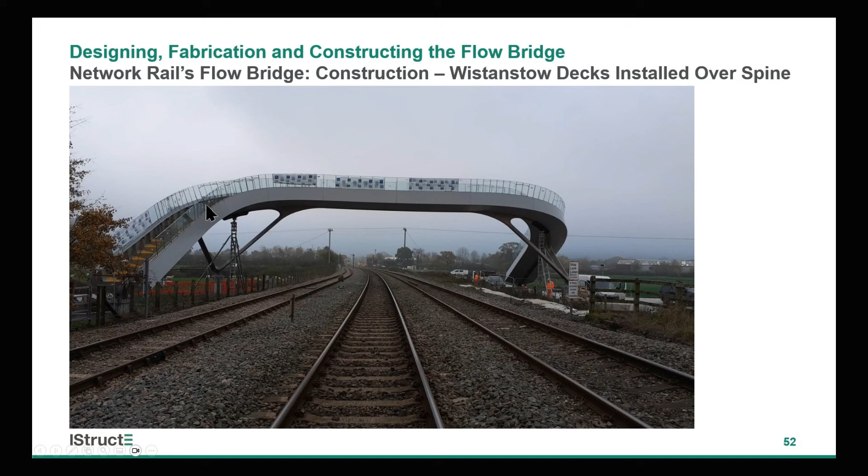This bit hasn't got the step unit installed yet, but we had anti-slip surfacing in there to help people walk through the deck and prevent trips and falls. And then that's the completed structure overlooking the pond.

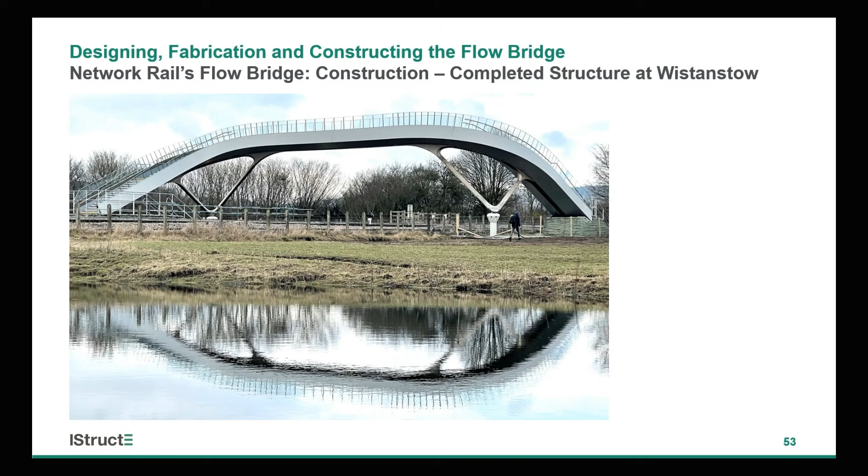We had flexi MSE reinforced earth wall there because the level here was a bit higher, so we had to accommodate that with that bit there, accommodating it down as part of the design. And then that's the bridge open to the public, and it was well received.

So just as a quick summary: it took us 11 months to develop the concept, from concept to fabrication and design, during COVID. The actual bridge itself weighed 25 tons, of which 5 tons was the glazing. It's designed to utilize glass panels, or we can use composite or other infill panels. Normal steel structures weigh around 35 to 40 tons, so that was quite good.

The cost itself is 30% lower than a typical steel footbridge. The modular components meant we had a quicker build. In the trial install, we had 2 to 3 weeks versus 2 to 3 months for a typical steel footbridge. In the prototype installation, we actually reduced it from 3 weeks down to 1 week on site. It has a 20% lower carbon footprint than other structures, and the overall whole life cost and maintenance is 40% lower.

We have an integrated structural health monitoring system in it because, it's an innovative design, but we're still learning to see how it behaves and how we could improve on it. So yeah, it's an enjoyable design. Thank you very much.